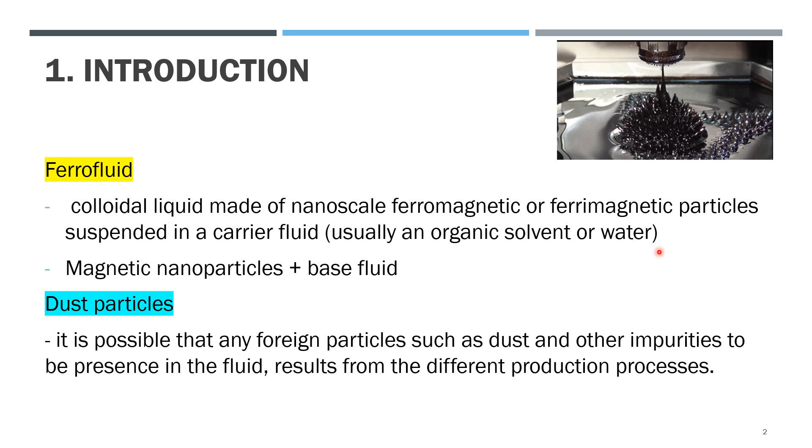We also study about stagnation point flow. This flow is where the velocity of the fluid becomes zero at a specific point in the flow field. There are many applications for this stagnation flow, such as sediment transport, pollutant dispersion, behavior of water flows, and many more.

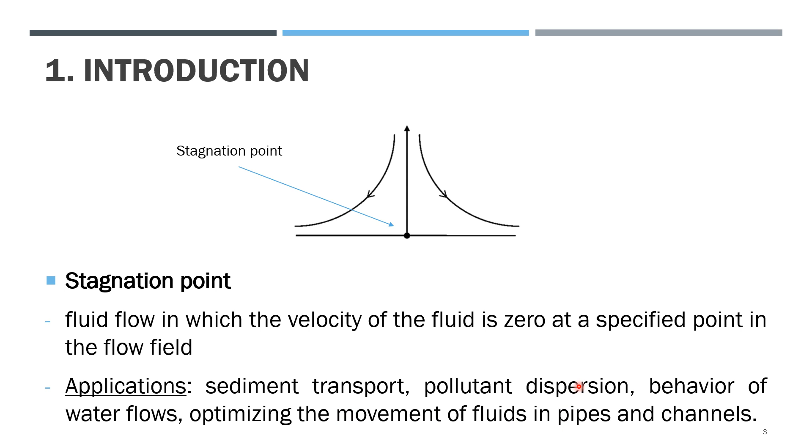These are some of the studies about stagnation flow in ferrofluid. In 2013, Khan et al. considered stagnation ferrofluid flow over a stretching surface. Then in 2020, Yasin et al. studied the stagnation ferrofluid flow with uniform magnetic field.

In 2022, Khashi'ie et al. studied the unsteady flow with heat generation. And in 2023, Zainodin et al. studied this flow with mixed convection and also convective boundary layer.

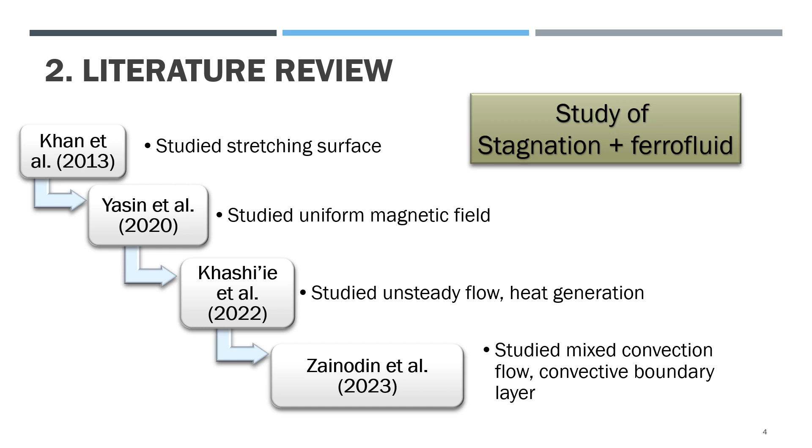Next, some studies of dusty ferrofluid. In 2015, Sekar and Raju studied this dusty ferrofluid with Soret effect in Darcy porous medium.

In 2022, Sandeep et al. considered this fluid with thermal radiation. And the last one, Hamid et al. in 2022 studied this flow with the inclusion of viscous dissipation and also stretching and shrinking surface.

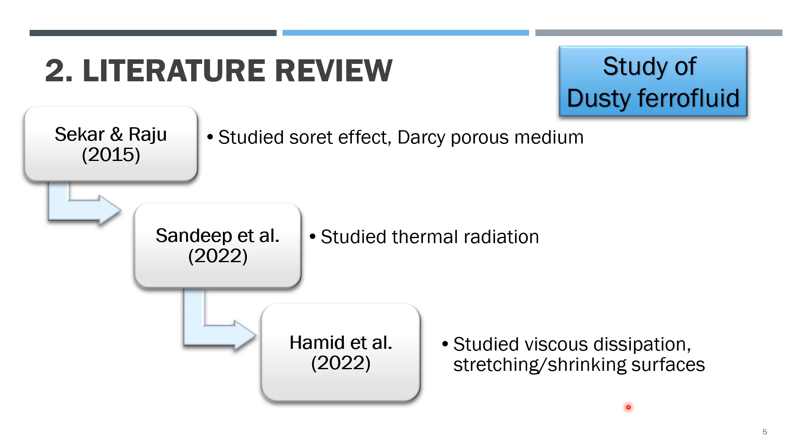So the objective of our study is to extend the result by Hamid et al. by considering the stagnation point flow.

For mathematical formulation, we consider a steady, incompressible, two-dimensional boundary layer dusty ferrofluid flow with permeable stretching and shrinking surface. In our study, we use magnetite ferroparticles with water and kerosene as the base fluid.

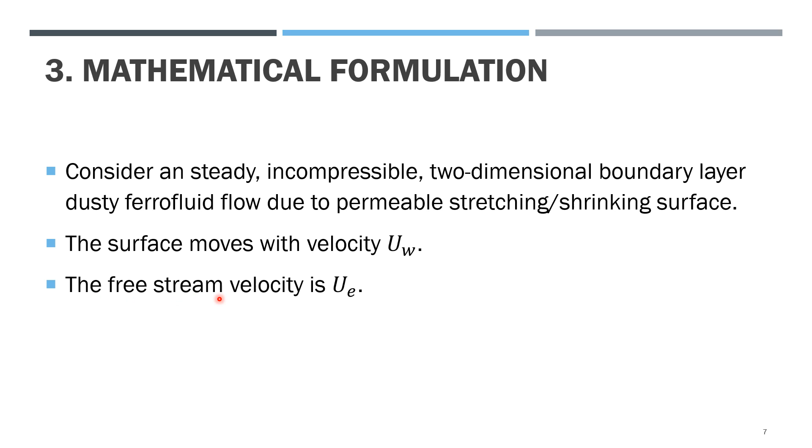This surface of the stretching and shrinking moves with velocity Uw. Since we are considering stagnation point flow, the free stream velocity is UE.

So this is the governing equations, where we have fluid phase and also dust phase. We have equations 1 until 6 with the initial and boundary conditions 7.

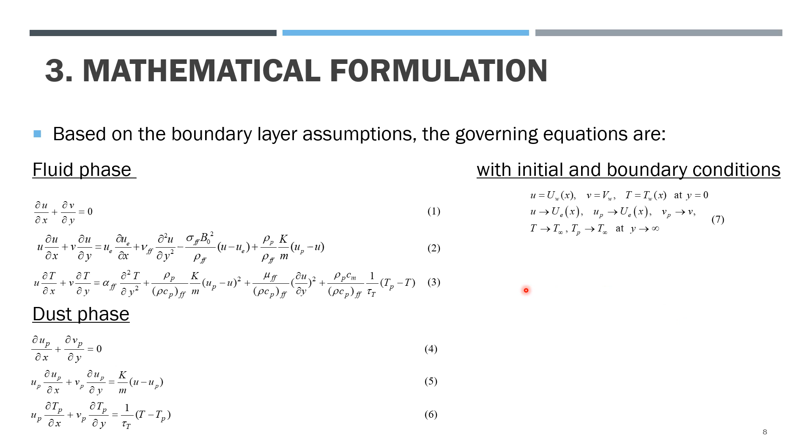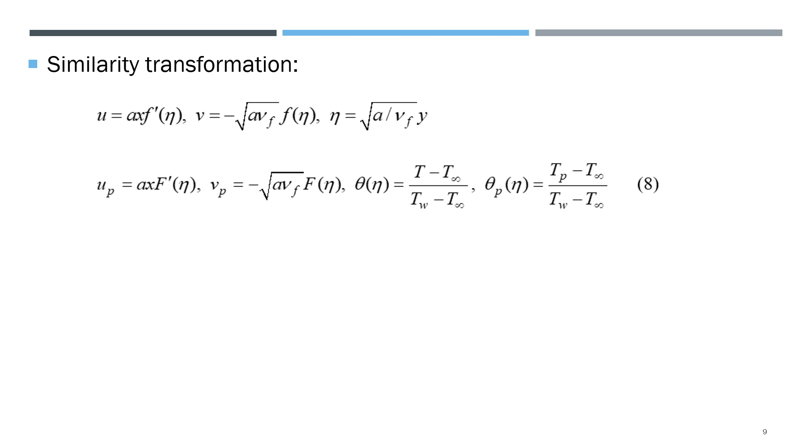Then we solve the previous equations using this similarity transformation, and then we transform the equations into equations 10 until 13 with the boundary condition 14. For these equations, we solve using the BVP4C method in MATLAB.

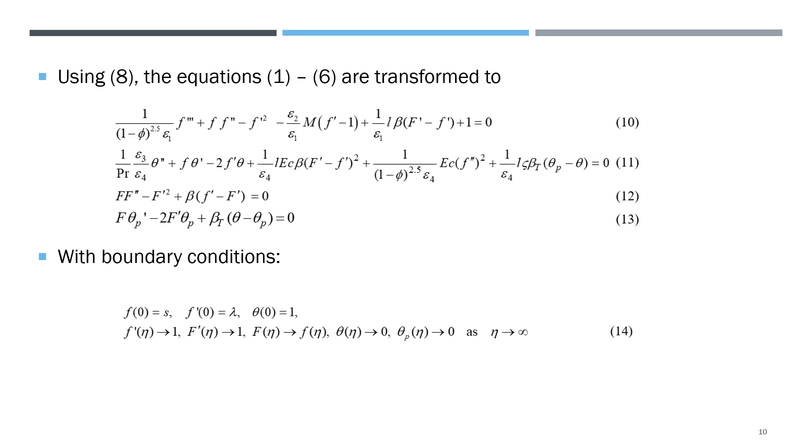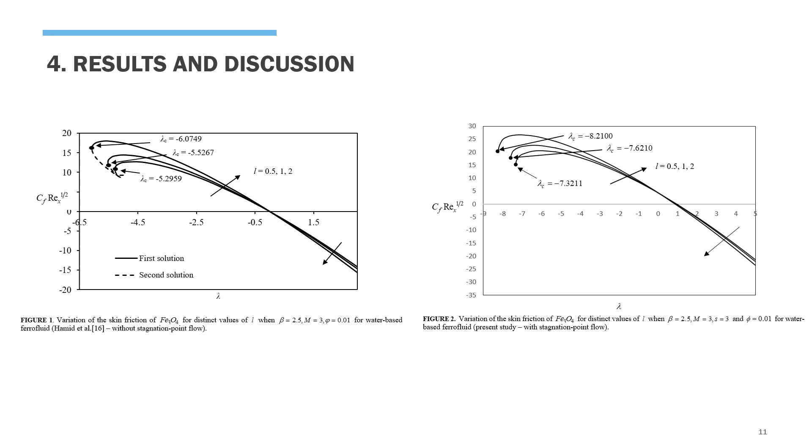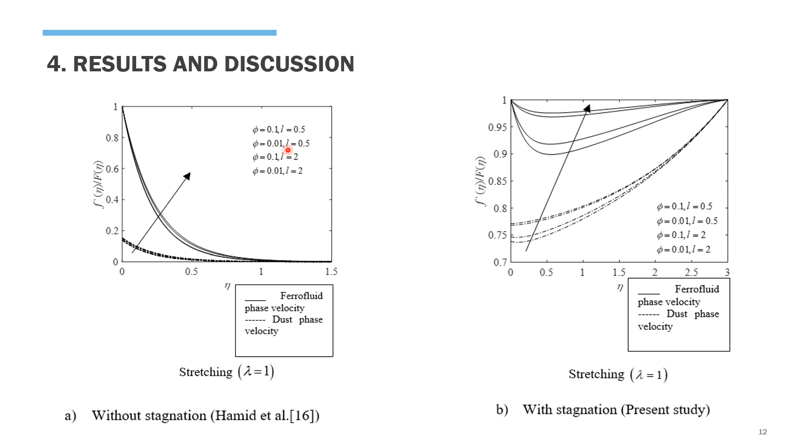We can see also in both figures that the effects of phi and L are the same.

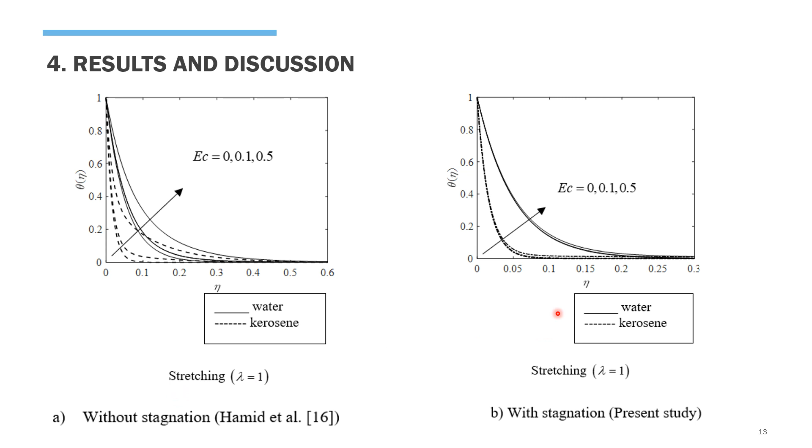As the conclusion, the result reveals that skin friction coefficient values for stagnation flow are greater in comparison without stagnation flow. Eckert number increases the temperature profile for both flows; however, its influence was more prominent in the flow without stagnation point flow.

This implies that greater Eckert number values result in a more significant rise in the temperature profiles for the flow without stagnation.